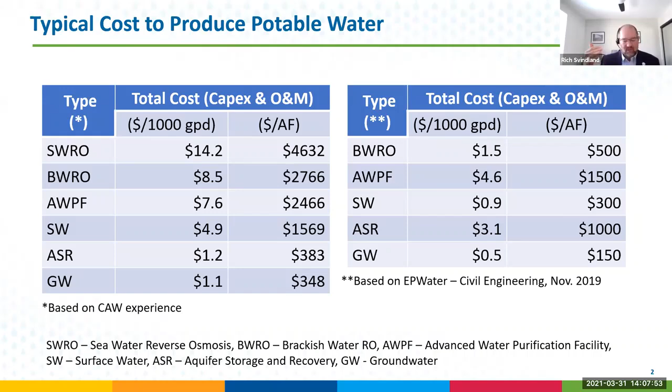I get a little bit of background. Okay, all good.

Just as another kind of background for California, my budget - I have about $250 million of operating revenue to cover the water for our service area. About 3.2% of that is energy cost only. It's balanced for us, which means if I buy more or pump more, I get recovery, and if I pump less, I give that back to customers. 23% of my budget, though, is purchase water, meaning I'm buying water from someone else who's also paid to pump it.

What I want to throw in these slides is that we all know that if I can conserve water, there's a direct benefit to pumping - less pumping costs, better water energy usage.

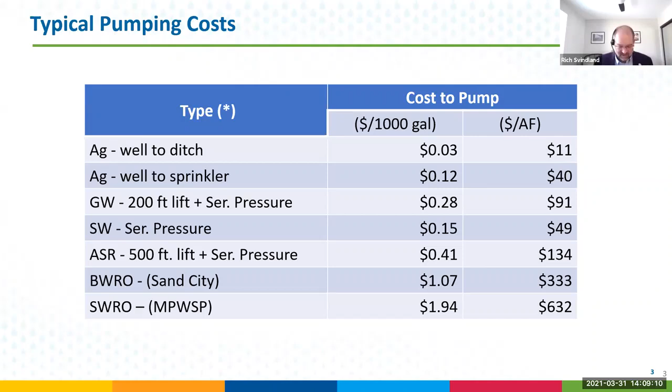All right, so I want to take a little bit of time just talking about a couple of different scenarios and different projects in California and different pieces.

This dam was deemed unsafe many years ago. We got commission approval to remove it, and now we don't have that luxury of gravity feed water and power-free water, if you will.

We have wells all along the river downstream from this dam, and we pump those up, and there's energy with that. Ultimately, in the San Clemente Dam and other issues on the Carmel River, we've been ordered to get off the Carmel River, and we're trying to propose a desalination plant. I showed you a couple slides back that has the highest energy cost of all the water. So even for the Monterey system, at one time very low energy footprint, now it's going to the most expensive energy footprint. So the water-energy nexus does change over time. It evolves as different things happen.

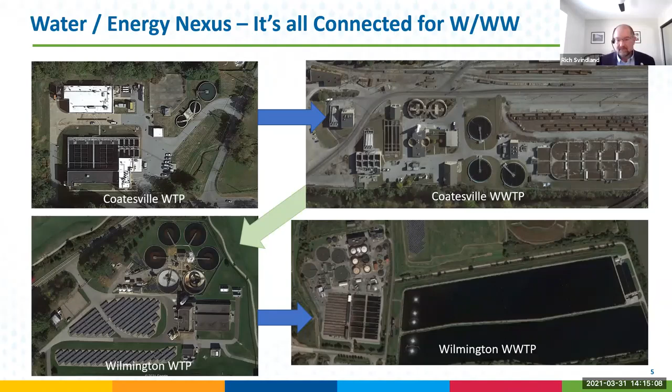Revenue stabilization policies that support fixed cost recovery. I mentioned at the beginning of my presentation that 10 years ago, my water production in California was over 90 million gallons a day. This year it's going to be about 70 million gallons a day. Although we try to be as efficient as we can with O&M cost, a lot of times those costs we can't change that much.

So we do need some ways to help prevent loss of income, so to speak, to make these systems work. Infrastructure surcharge programs - a lot of states have those to replace leaky mains, which we know is wasted water. Those are great programs, but there are discussions on how to expand that for above-ground infrastructure, specifically projects like variable speed drives or upgrading to high-efficiency motors. Are those the type of common projects that could also be part of an infrastructure surcharge program? A lot of folks in different states are thinking about that.

Future test years is always a good thing, because it trues up the cost for that year based on what's going on during that year, as opposed to looking back. It's a good way to help drive conservation - as demand goes down, the future test year process helps true that up.

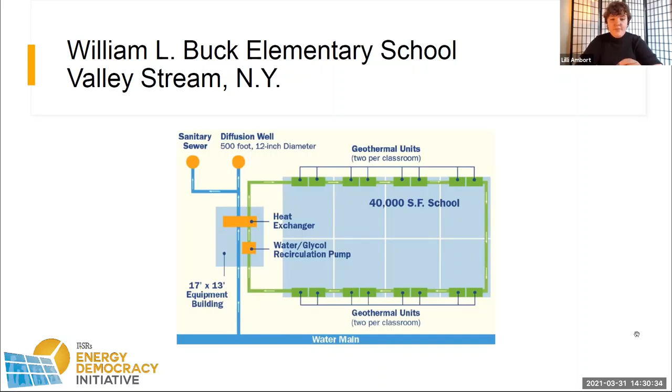Another example of this is in Canada, not in the United States: the Deep Lake Water Cooling System in Toronto. The Toronto Deep Lake Water Cooling Project provides air conditioning to about 51 buildings in downtown Toronto with 3 intake pipes from Lake Ontario.

This system also has 2 different lines: one that uses the water for potable drinking water, and the other that facilitates heat exchange with the downtown area. This system uses the potable water to air condition about 29 million square feet of downtown Toronto, and has reduced electricity consumption in the area by about 90% and reduced CO2 emissions by about 79,000 tons. This shows a much larger scale of using water main geothermal in a cost-effective way for building cooling.

Once again, this is showing the feasibility of this kind of project in leveraging the water energy nexus as well.

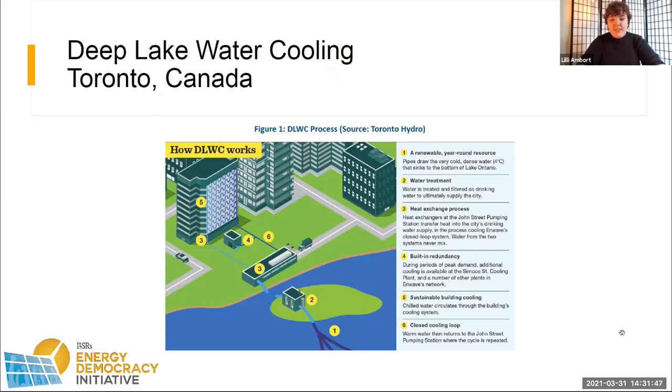Just as one last example, this one isn't included in the report, but it's a more recent example and really complementary to the William L. Buck case study. The Towerside Innovation District is a 370-acre district in the Twin Cities with plans to build heating and cooling systems using groundwater in about 4 buildings, and once that infrastructure is there, they plan to expand the system to even more buildings in the district.

The buildings will use low temperature district heating and cooling using local groundwater as the primary source, storing heat from the summer in underground aquifers, then taking that heat and energy in the winter months to jumpstart the heat pumps in the buildings. The Towerside Innovation District, currently under construction, chose this system because it was less expensive than other standalone systems for the buildings and reduced greenhouse gas emissions by 19% in their projections.

This is a really complementary model of what's happening right now in using the water energy nexus, looking at how we reduce CO2 emissions and greenhouse gases, reducing electricity consumption, but also maintaining a sense of comfort in residential areas.

We use a lot of these findings from these case studies on the feasibility, the cost effectiveness, and the lack of any sort of harm or changes to the water main, because that's really important to us in terms of looking at residential applications of water main geothermal. These are really large scale applications, but we want to see that spread out over residential areas or neighborhoods. What would this kind of model look like?

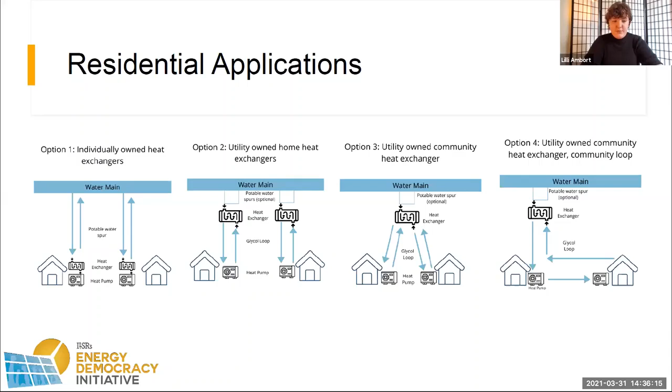This is again just more of an economic analysis instead of an analysis of the viability. We've already established the viability of the residential applications of this system, but now we want to look at the economic viability. We found that the water main connections for geothermal heat pumps actually cut the cost of traditional geothermal systems in half.

The annual cost savings would be about $400 for homeowners, with energy savings of up to 50%. Additionally, these geothermal systems decrease emissions by about 85% compared to traditional HVAC systems. So not only is this system viable in residential applications, but it's also economically competitive and can save homeowners hundreds of dollars annually.

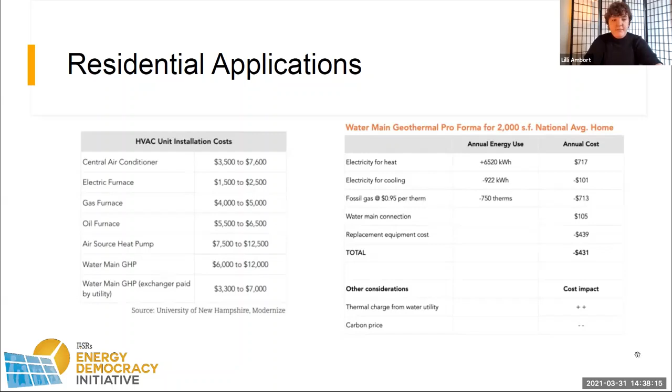We found that public water utilities serve about 84% of water customers. As Rich said in his presentation prior to mine, a lot of these water utilities don't really have the capital to implement large projects or upgrade infrastructure necessary for water main geothermal. But this project is quite different because it provides a new income stream for water utilities.

As an example of what this would look like, the city of Toronto with the Deep Lake water cooling system receives about $1 million annually as an energy transfer fee for use of city infrastructure. So if we're creating a utility from just a water utility, we're combining it with an electric utility to provide heating and cooling.

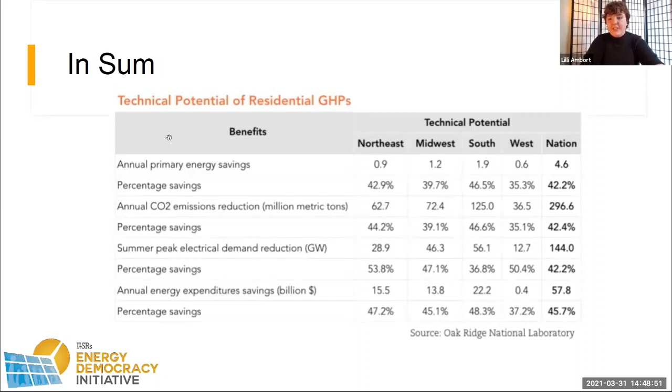Our report goes based off of the extreme weather assumption of -30 degrees over 72 hours. Our assumption is primarily that at that point in time, it would be drawing heat mostly away from the water main. So our report, and any reports I've read leading up to producing our publication, really didn't have much analysis on water main heat exchange. This is actually a really novel idea as far as the United States goes, so there really isn't much out there. That's why a lot of cities would need to conduct feasibility studies on what that would look like.

There may be opportunities for both pathways in cities, especially if one homeowner is drawing heat from the water main and another homeowner is putting heat into the water main. That might actually be a more beneficial calculation as far as the temperature impact within the water main—it might mitigate one another. That would require more of a feasibility study than what we conducted in our report.

Okay, and then we have time for one last question: if the water is not being used after the heating cooling system, in the school example, is the energy needed to treat the water in the first place being accounted for in the energy savings estimate?

A lot of the calculations—there were quite a few issues with William L. Buck as far as jurisdictional and code issues went. With the heating cooling system, the water is not being used, so the calculations for energy savings just account for energy savings for the school. It doesn't necessarily account for the energy that was used by the water utility to treat the water.

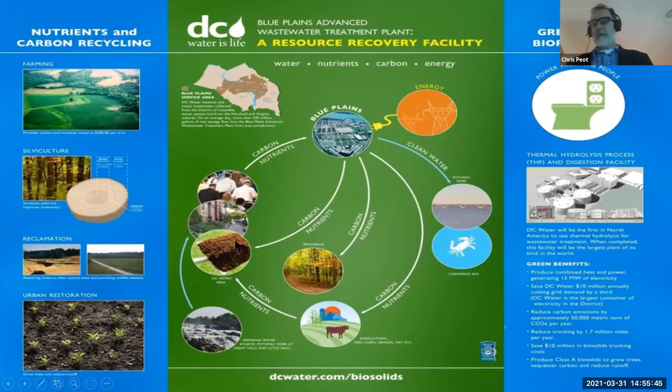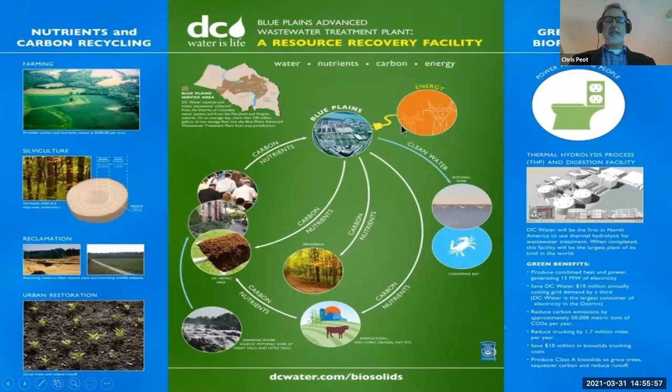So when we designed the digesters, we decided we wanted to shorten that cycle and make a product we could use as much of as possible within the service area of DC, so that we could sequester carbon in DC, solve some environmental problems, improve the soils, and make use of really an asset, while also making clean, green, renewable energy and returning clean water out to the Potomac River.

So this digester and CHP, combined heat and power project, converts this waste into an asset, generates clean, green, renewable energy, makes a fertilizer product which returns carbon and nutrients back to the earth, reduces our carbon footprint substantially—I'll tell you how much in a little while—and saves us operating expenses and generates some revenue. I think it's this rare combination of municipal projects that is both economically and environmentally beneficial.

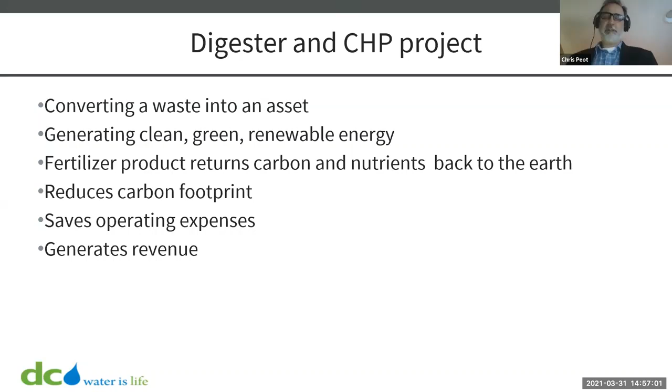This was a $470 million project. Normally that sum of money is reserved for projects forced upon us by consent decree or permit requirements, with no payback period. Well, this one, I was very proud of our board for giving us the discretionary money. We didn't have to do this, but it made sense environmentally, and it made sense economically as well.

Got a couple of research projects on that. There's all kinds of beneficial microbes that end up in the soil. That's really important.

And then energy. There are all kinds of energy aspects to the biosolids. The obvious one is the gas we make that we convert into electricity. But also when we digest it, we have less material.

We used to produce about 1,100 wet tons per day, or about 65 to 70 18-wheelers, of treated human manure that we sent out to farms in Virginia and Maryland. Now, after digestion, because we've converted a lot of that organic matter to gas, we're down to about 25 trucks. So that right there is an energy savings. We've only got about a third of the trucks on the road.

But also, when farmers put it on the ground, they do it because it has nitrogen in it, and then they don't have to buy ammonium nitrate, which takes an enormous amount of energy to make. If we assume that energy comes from fossil fuels, natural gas, then it's an energy savings from that standpoint too. And we have that all in our carbon footprint.

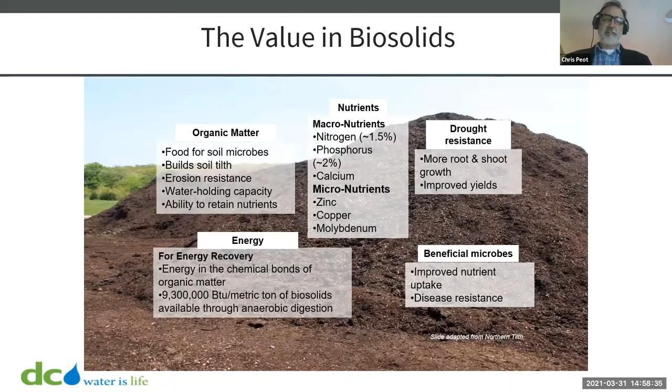So when we built these digesters, we commissioned them and started them up about 5 years ago. It gave us this new marketing opportunity for the gas. We're choosing to use the gas ourselves, but we're also generating renewable energy credits. And then for the biosolids product coming out of the bottom, we no longer had just one option, agriculture, because it meets EPA Class A standards.

It can be used in an urban setting. I have it all over my lawn. We grow vegetables in it. I know I'm a biosolids guy, but it's a really beautiful product.

And the key to it is this thermal hydrolysis process. I'm going to go back a slide here. I know there's a little bit of a delay, but a lot of people have digesters. What we have that's unique to North America, it's the first one in North America, largest one in the world.

It's all over Europe, but it's this thermal hydrolysis process, a high heat, high pressure system. It's really just a pressure cooker for the solids. We collect the solids in the treatment plant, put it through the system. It gets up to 165 degrees centigrade, not Fahrenheit, centigrade, so it absolutely kills all the pathogens. And it's at about 90 PSI, which is about 6 times atmospheric pressure.

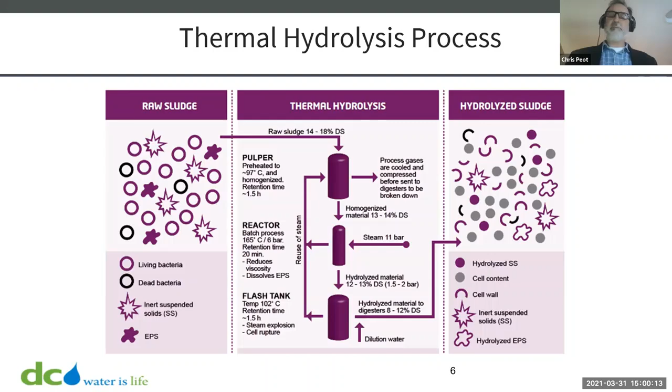Then it goes to this last tank, which is back at atmospheric pressure. When that happens, that sudden pressure drop causes the cells to burst. So then what we have is a sterile, very available food source for the hungry archaea in the digester. We get better gas production, and very solid, very stable solids coming out of the bottom.

So we collect the solids, they come through here, get screened, go through the thermal hydrolysis process into the digesters. They stay in the digesters for about 20 days, we pull the gas off the top, bring it over to this building, which is our gas cleaning facility. From there, once it's cleaned, it goes into this building. You can't really see it, but we have three 5-megawatt turbines in there. We burn the gas, they spin, and we collect that motion to generate electricity.

We generate about 13 megawatts of power, which we use on site because we're the biggest user of electricity in DC. Our total demand is about 25 megawatts, so it serves about a third of our needs.

But turbines, when they spin, generate a lot of heat, and you have to shed that heat or you will melt your turbines. A lot of people will just put a water jacket on it, pull the heat off and dump it. But we need the heat.

So we put heat recovery steam generators at the end of each of those turbines, collect the heat, generate steam, and then it goes over here in this silver pipe, which is what we use to heat up the thermal hydrolysis process. It is incredibly energy efficient—we don't need any outside energy to heat this up. And both the electricity and the steam we're collecting are considered renewable energy sources, so we get credits for those, and we can sell them.

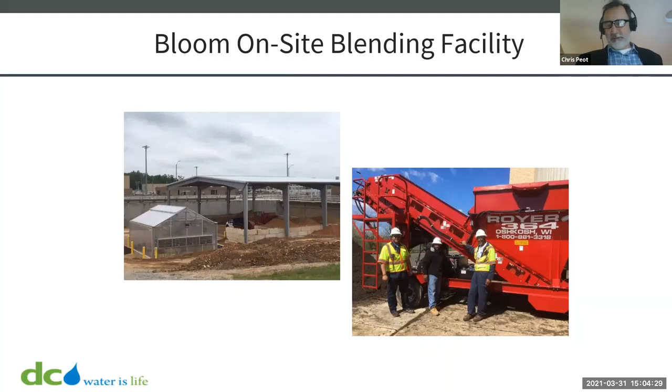And then we keep track of customers to make sure that we are diversifying our end use. Still the vast majority of it goes to farms, but we are really getting into the construction market and landscaping. We love that because, as I mentioned, you put it on the ground, it's an energy use as well.

That was our first sale. Now we're 5 years in, and as of the end of last year, we marketed about 45,000 tons. We saved $1.3 million over traditional hauling fees, and we had revenue of almost $200,000, for a total of about $1.5 million turnaround, which is pretty great.

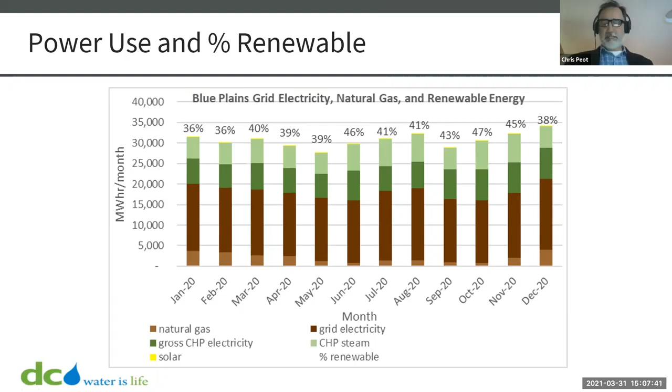And this is our CHP steam recovery, also converted from BTUs to megawatt hours. You can't really see it here, but there's a small sliver on top for solar, because we have some solar projects and more coming online soon. We're very proud that we're approaching 50% renewable from a product that as recently as 10 years ago was considered a liability.

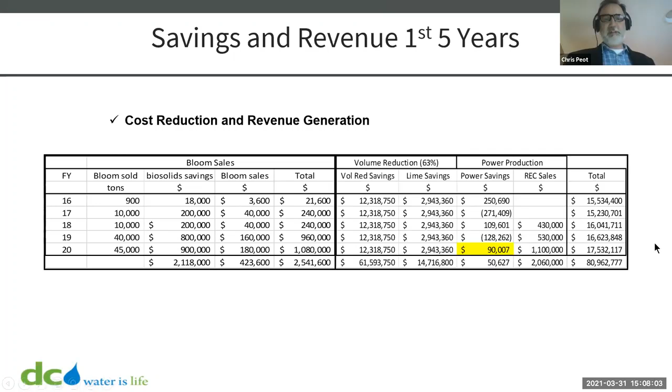And the beautiful thing is every city in the country has this asset at their disposal to do with as they please. So the savings and the revenue for the first 5 years are right here—Bloom sales, that's the Bloom sales part of it. We were up a total of about 1.1 million, as I mentioned last year. But if you look at other aspects like volume reduction, had we not built the digesters, we would have had to spend an additional $12 million.

My budget for recycling the material used to be $19 million a year. Now it's about 5 or 6. We don't have to spend money on lime, we get some power savings, and then there's REC sales as well. The total for the 5 years is about $81 million, which if you look at the capital costs ends up being about a 15-year payback period, which is good because the bulk of the investment is for the digesters, which have about a 75-year lifespan.

So our mantra is there's no such thing as waste, only wasted resources, and we should all take advantage of this precious commodity—our feces.

That's all I have. I think we can open up for questions.